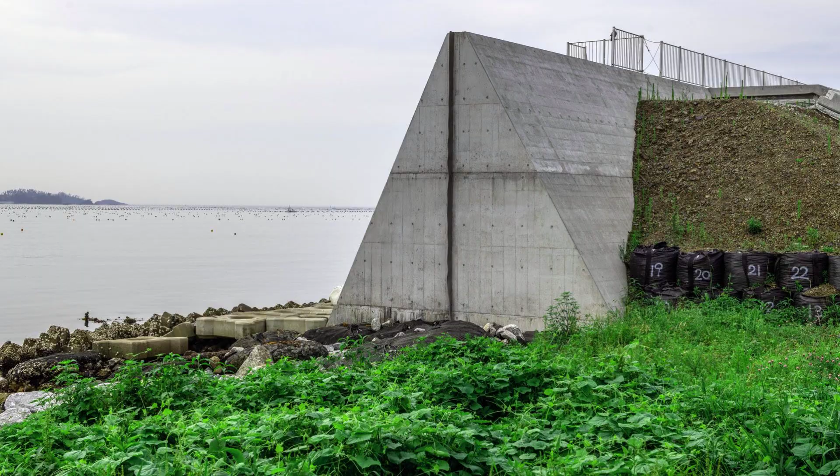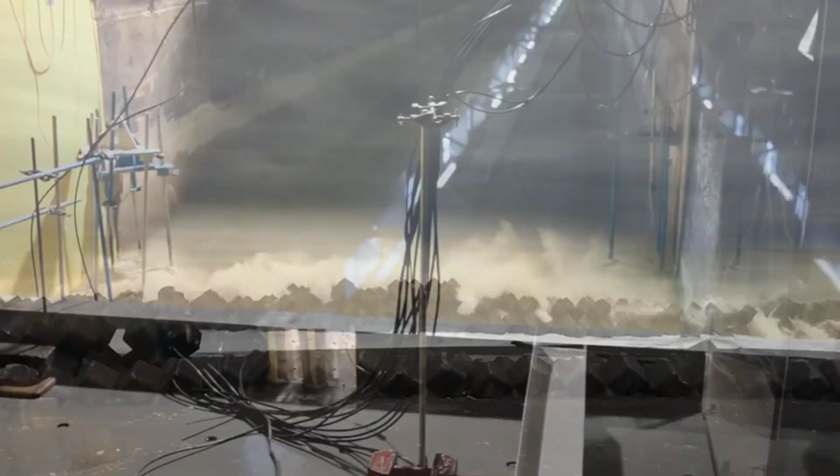A helicopter skims Japan's coastline. Below, a wall taller than a four-story building runs to the horizon, 400 kilometers of concrete between the Pacific and the people who refuse to leave. $12 billion, every meter paid for in grief. Sensors buried inside track each millimeter of movement, because the ocean never stops testing the stone.

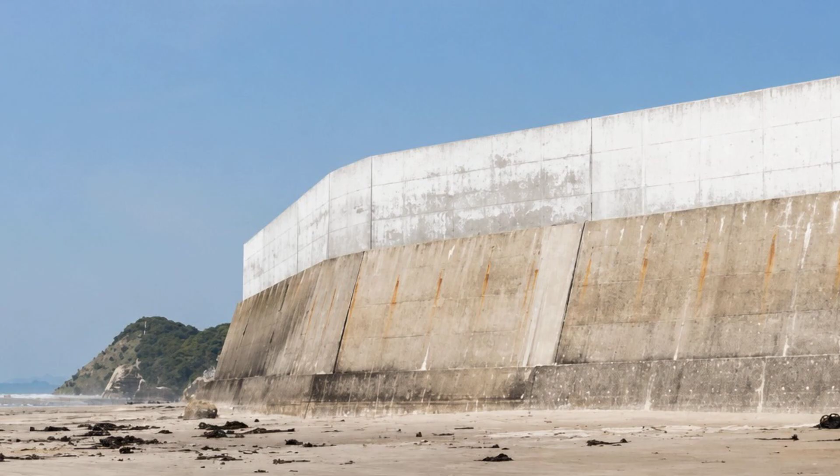The engineers who built it issued one warning. If this wall fails, it makes the next tsunami deadlier than the one that demanded it. Before the new wall existed, Japan already had seawalls. Thousands of kilometers of them, guarding nearly every populated stretch of coast.

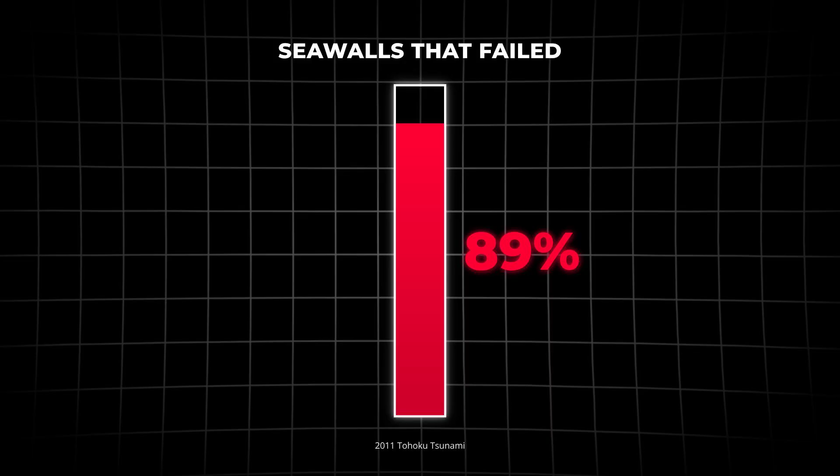On March 11, 2011, the ocean floor lurched 50 meters in 3 minutes. Not a tremor. A geological rupture tearing across 500 kilometers of seafloor. The Pacific didn't ripple. It mobilized. What crossed Japan's coast 30 minutes later wasn't a wave. It was a moving wall of black water, 40 meters tall at its peak, and it treated everything in its path as debris. 90% of Japan's seawalls failed in a single hour.

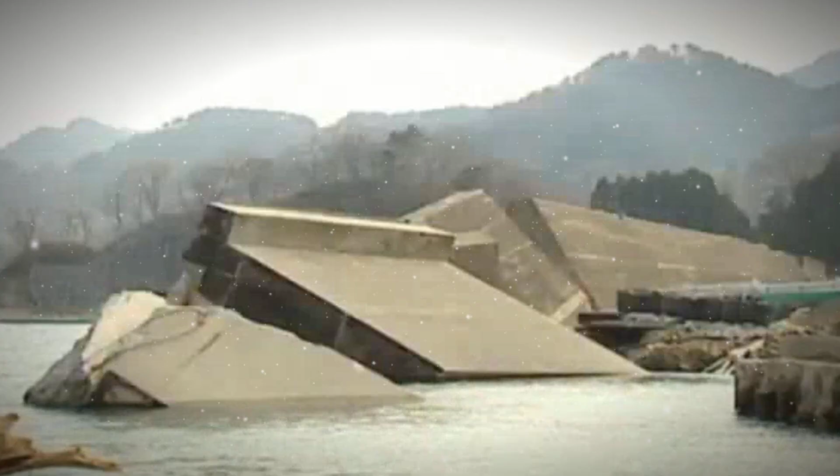The ocean didn't overpower them from the front. It climbed over them. Water cleared the top, found the unprotected back face, and clawed the foundations out from underneath. The walls didn't shatter. They were swallowed from behind. The kill mechanism was overtopping, and almost nothing in Japan's entire coastal defense had been designed to survive it.

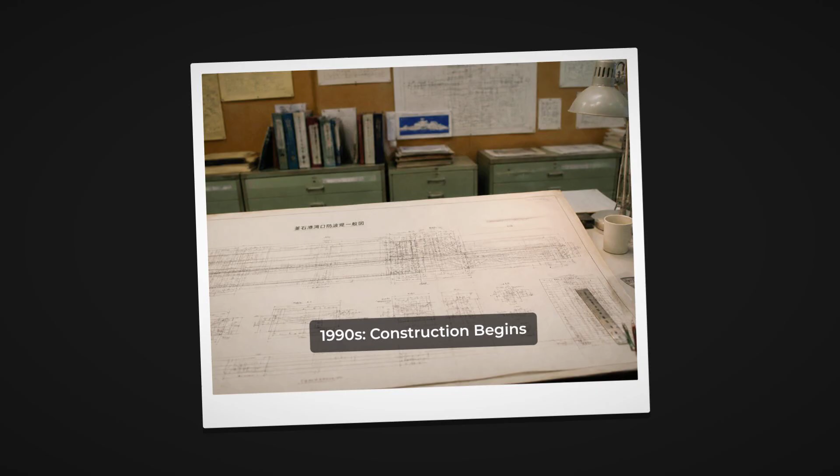The world's largest breakwater stood at Kamaishi. $1.6 billion of engineered concrete, a structure that took decades to design and build, positioned to be unbreakable. The tsunami erased it in seconds. Water poured over the crest, attacked the landward side, and the foundation soil liquefied under the assault. A generation of engineering vanished in less time than it takes to boil water.

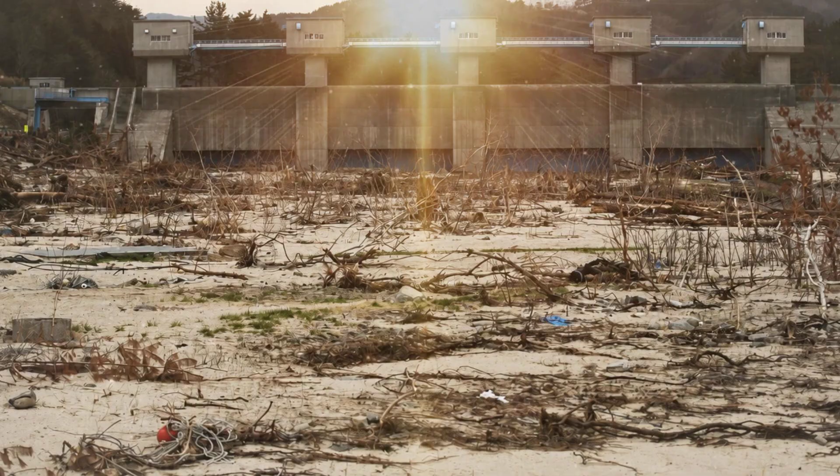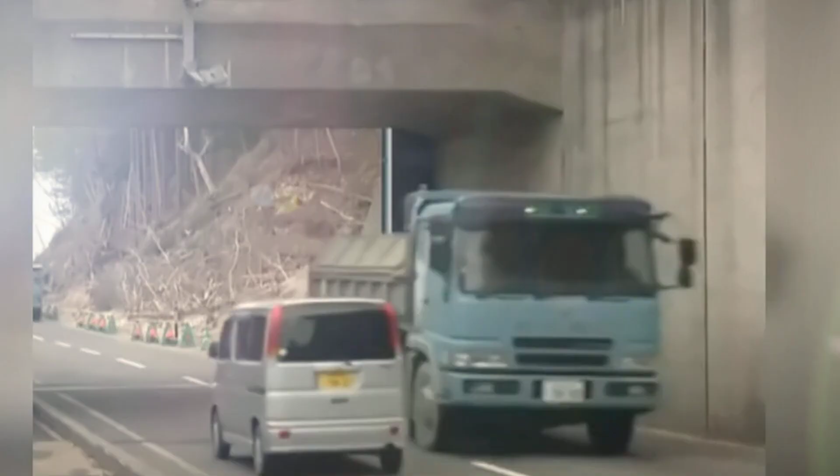18,000 people died that day. Entire towns ceased to exist between breakfast and lunch. But one village survived, not because its wall was smarter, not because the ocean showed mercy. One mayor had spent years fighting his own residents over a wall they thought was too tall, too expensive, too ugly. He won the argument. 3,000 people lived because of it.

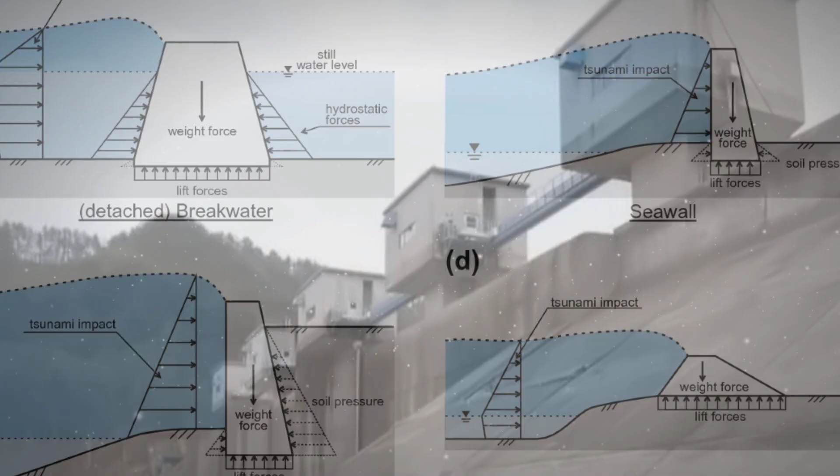That single political fight, waged in meeting rooms years before the wave arrived, gave Japan its blueprint for what came next. The blueprint was simple: build taller. But the engineering underneath that sentence would consume a decade, $12 billion, and 440 separate construction teams racing to build simultaneously along 400 kilometers of active coastline, the same coastline the ocean had already proven it could swallow whole.

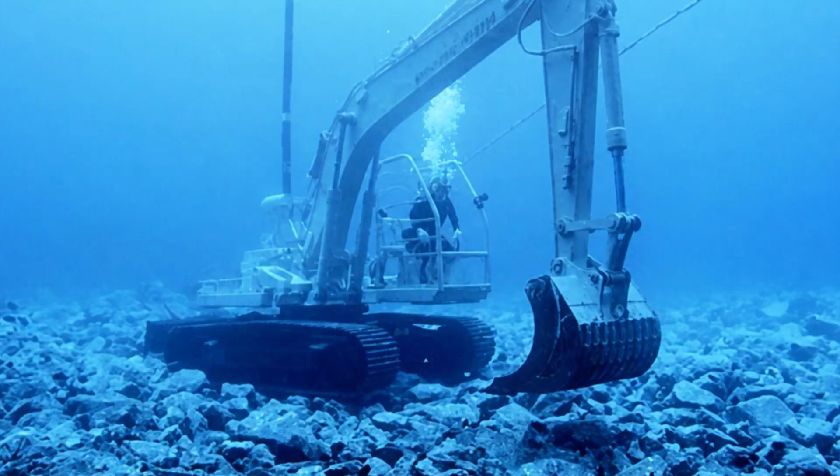Most of the wall is underground. Only 14 meters show above the surface. Everything holding it upright hides beneath the seabed, and the seabed is actively trying to destroy it. Before a single stone touches the coast, survey ships drill the ocean floor to map what waits below. Every kilometer reveals something different.

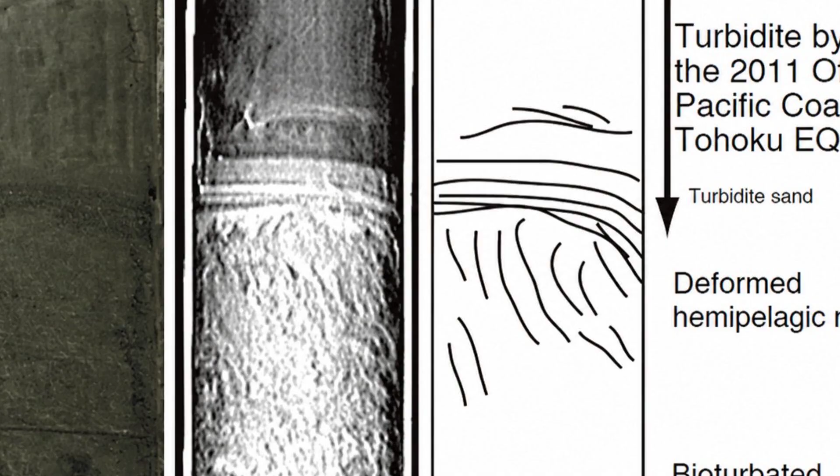Soft clay that swallows anything heavy. Dense sand that shifts under pressure. Hard rock that shatters drill bits. Each demands completely different engineering underneath, and getting it wrong means the wall above slowly tilts, cracks, and feeds itself to the tide. Engineers modeled each section 200 times in a computer before committing a single boulder to the water.

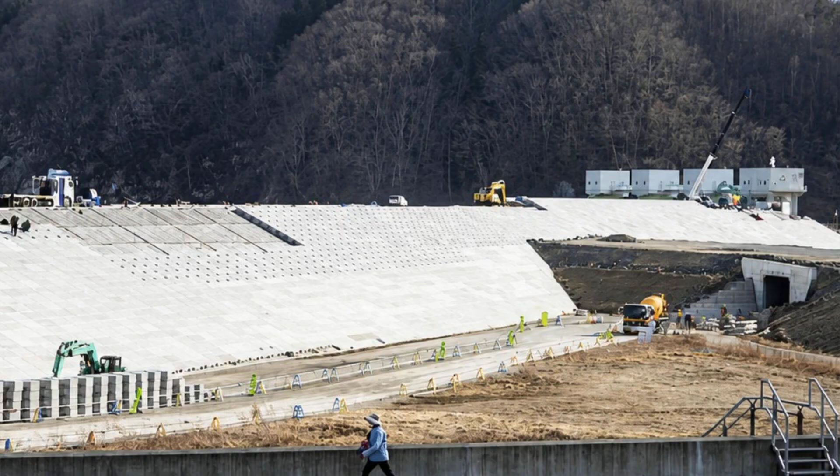440 separate teams worked simultaneously, and if even one contractor went bankrupt mid-build, a gap would open in the wall. The ocean doesn't negotiate with gaps. The tide dictated everything. 4 hours of exposed seabed per day. Every minute accounted for. Every task sequenced against the water's return.

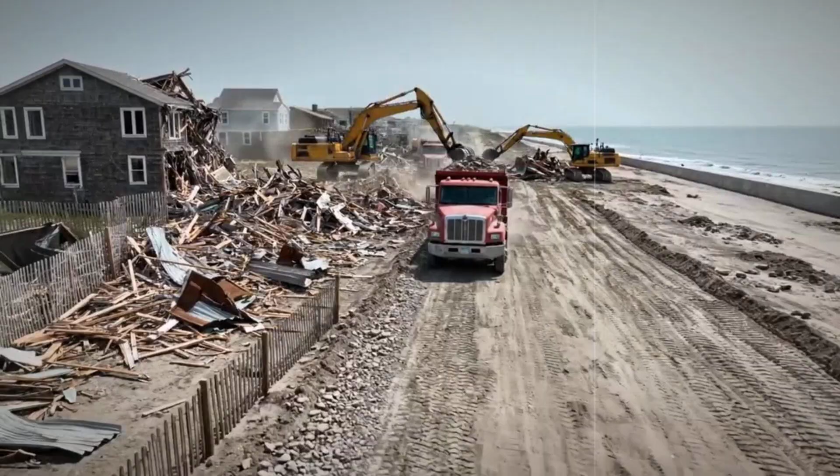In clay zones, the ground was so dangerously soft it couldn't support a bulldozer. Steel road plates spread the machine's weight so it floated above mud that would have devoured it. Simple, effective, and repeated for kilometers of coastline where the earth refused to cooperate.

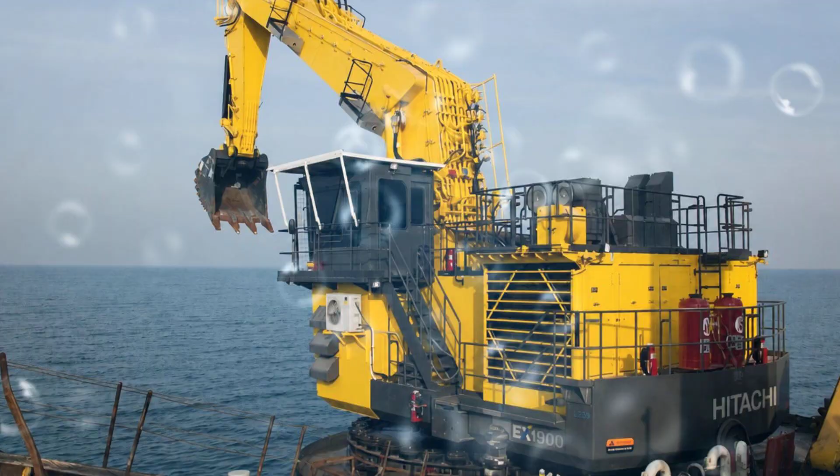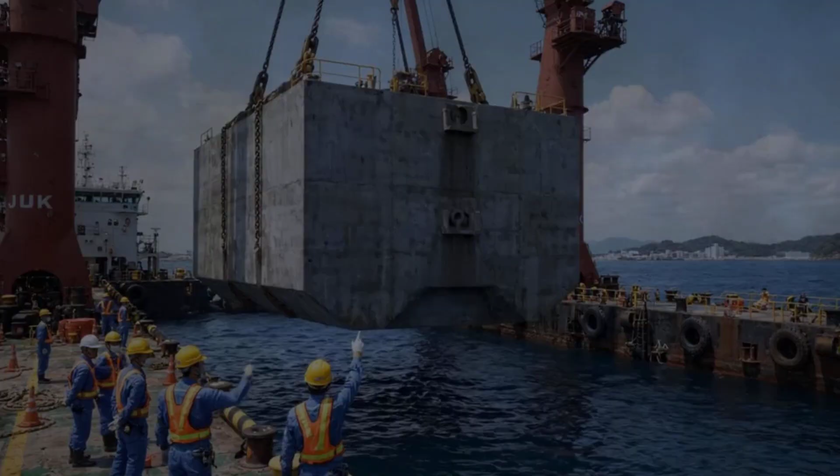Then the work moved underwater. Divers guided 5-ton boulders into position in the same ocean that had just destroyed the coast, while engineers tracked their progress by sonar alone. Nobody could see the foundation taking shape. They trusted the data, or they trusted nothing.

Between the boulders and the fill material sat a filter layer, a membrane so critical that missing it in a single section would let the wall slowly bleed its foundation into the sea, grain by grain, until the structure above had nothing left to stand on.

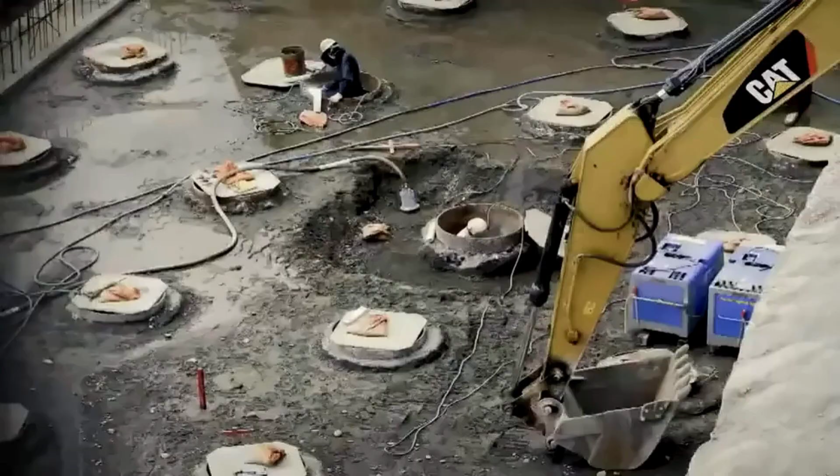After weeks of blind underwater construction, the rubble mound finally broke the surface. The foundation existed, but now the wall had to rise into open air, and every layer it gained made it heavier, less forgiving, and more vulnerable to the thing that had killed every wall before it: rain.

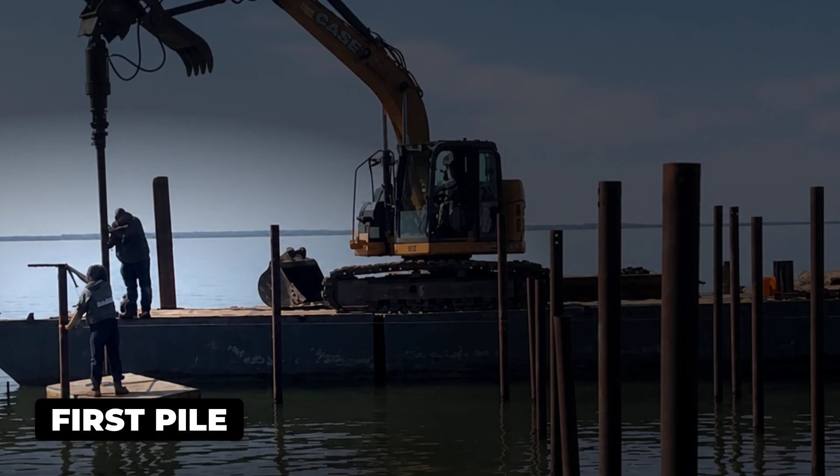The first steel goes into the ocean floor, not upward. Sheet piles driven 10 meters deep protect the wall's toe, but not from the arriving wave, from the retreating one. Backwash, the vacuum of water pulling back toward the sea, is what murders foundations. It sucks the sand out from under the structure and leaves the wall standing on nothing. The arriving tsunami gets the attention. The departing water does the killing.

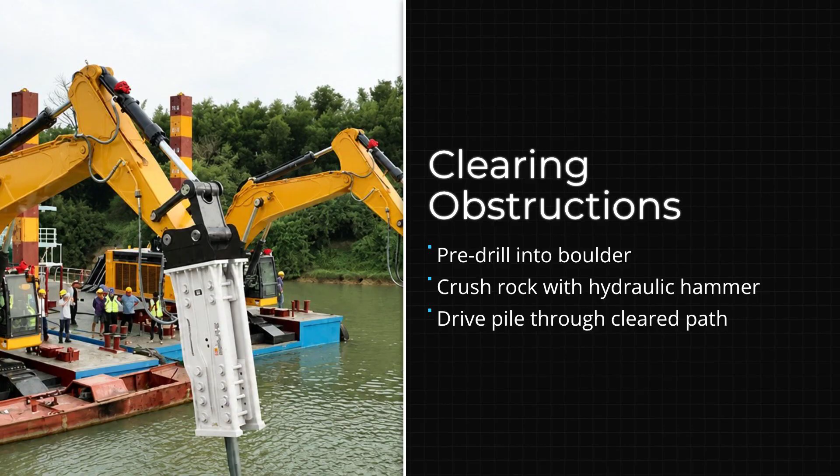One buried boulder deflects a 12-meter pile sideways, and the entire alignment is destroyed. The fix is brutal. Pre-drill the boulder, crush it in place, then drive the pile straight through the cleared hole. Clean. But every obstruction costs hours the schedule doesn't have.

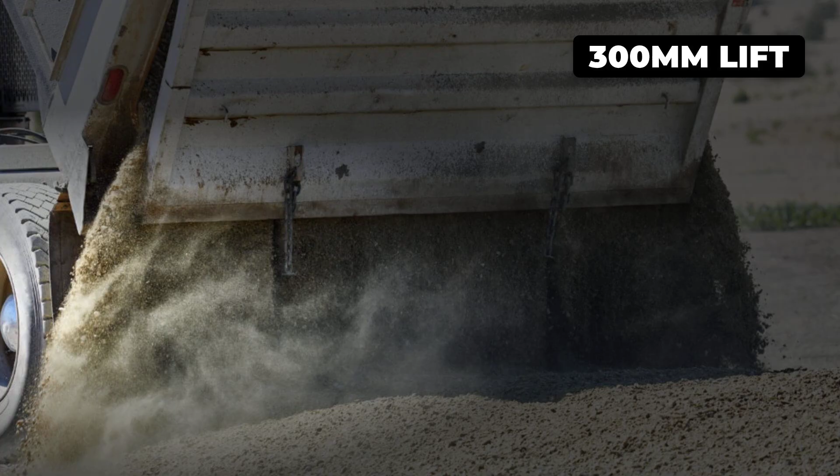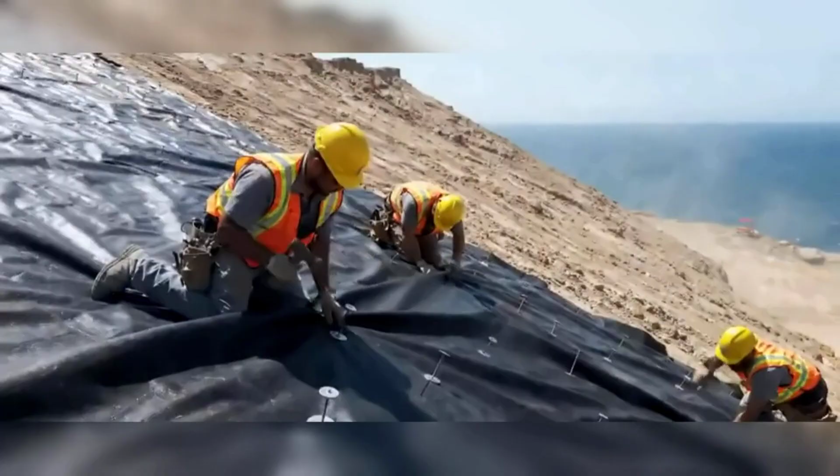Above the piles, fill arrives in 300-millimeter lifts, no thicker. A compactor can't reach the bottom of anything deeper, and uncompacted fill settles unevenly, and a settling foundation tilts the wall. Geotextile reinforcement layers run through the body like tendons, holding compacted earth together the way rebar holds concrete. Every single layer is tested.

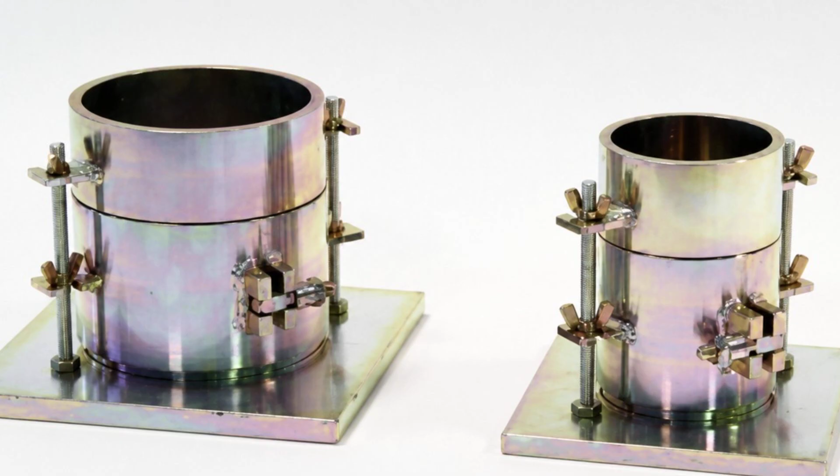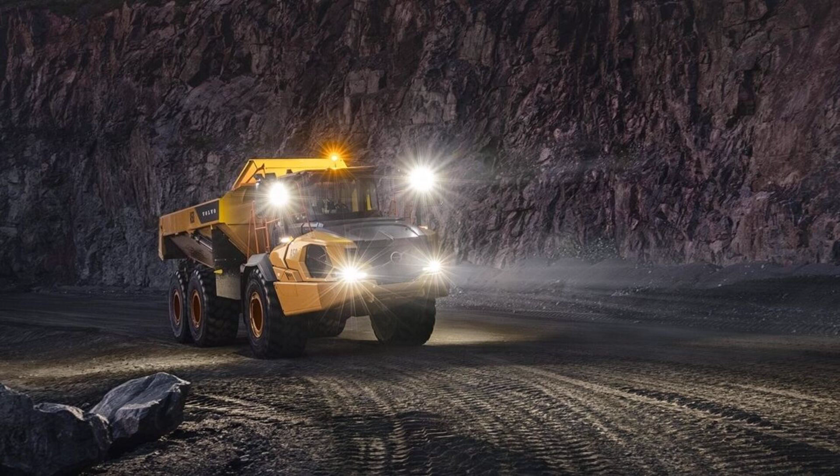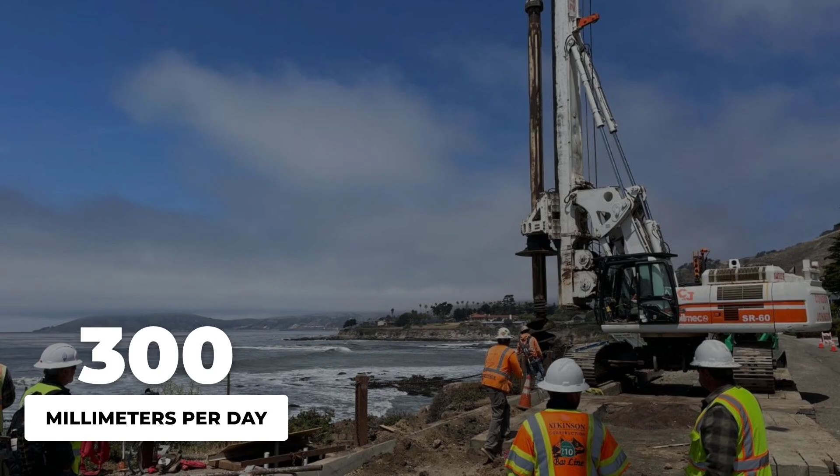98% Proctor density, or the inspector shuts the job down. Press your foot on fill compacted to 98%, and nothing moves. At 85%, it sinks beneath you. 30 dump trucks running 16-hour shifts fed the wall non-stop. One breakdown stalled the entire compaction cycle. 300 millimeters per day, 18 months until the first tsunami season with the wall standing. The math left no margin.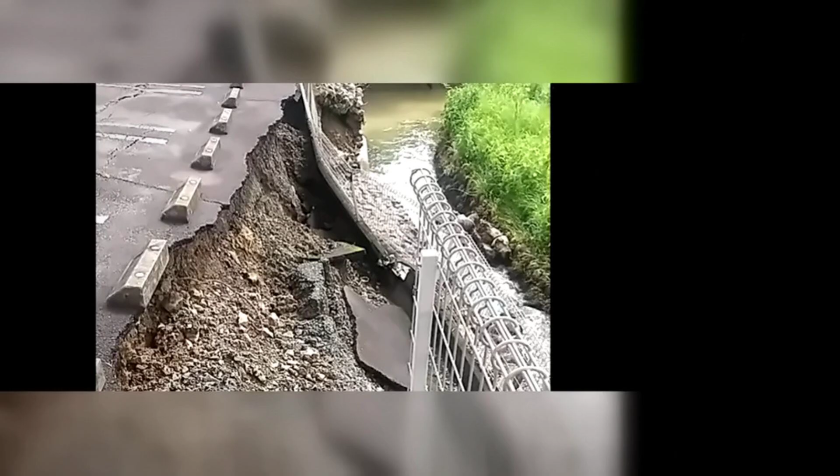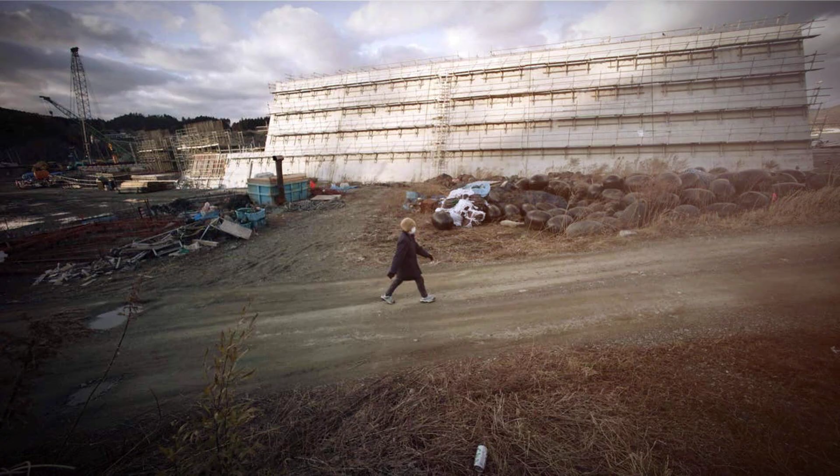Then a single night of heavy rain erased weeks of progress. 600 millimeters of completed slope slumped away in the dark. The entire section was rebuilt from scratch. After that, every slope was covered with geotextile before every rainfall, no exceptions. The rain had taught the crews what the ocean already knew. Water doesn't need to arrive as a tsunami to destroy a wall.

At 10 meters, the earthwork stopped, and the first 7-ton concrete panels arrived, slabs that would take a tsunami at 30 kilometers per hour and hold their ground for 100 years, provided every millimeter of their casting was perfect.

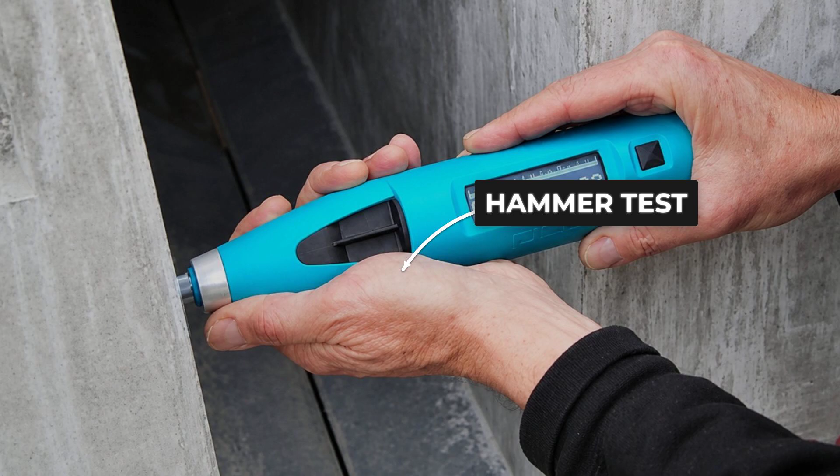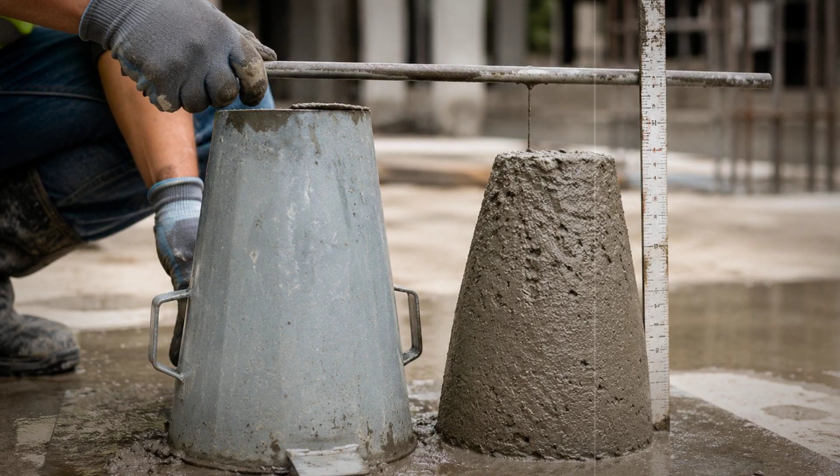A technician taps a freshly cast panel with a hammer. A solid ring means good concrete. A hollow sound means the panel gets crushed. 7 tons, $800, destroyed on the spot. Zero tolerance on tsunami walls. The wall demands perfection, and it enforces that demand by consuming its own components.

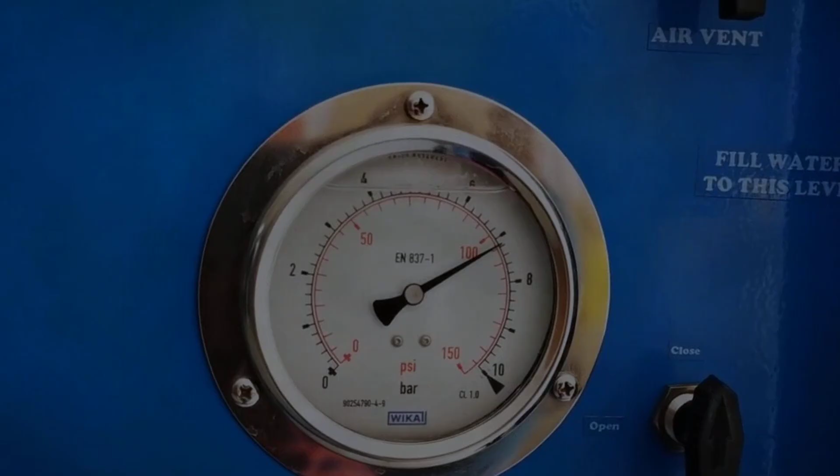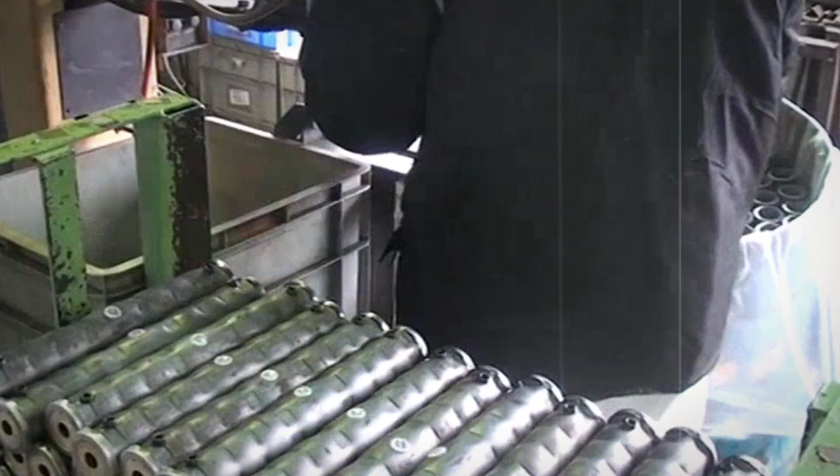Wrong concrete slump, and the panel face honeycombs, tiny air pockets that become entry points for salt water, then corrosion, then failure under wave pressure. One bad batch condemns the entire production run. Self-compacting concrete flows around every hairpin bar connecting panel to crown wall, filling every void, leaving a surface smooth enough to deflect a tsunami without giving it anywhere to grip. One missing bar breaks the connection. One void compromises the face.

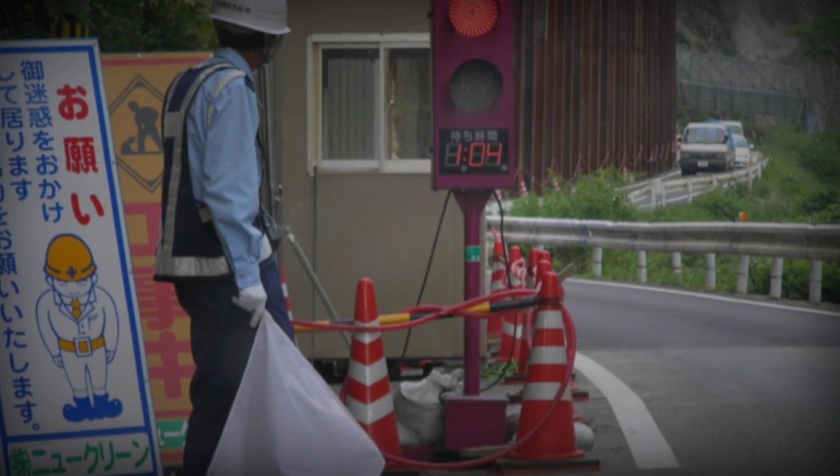7-ton panels travel narrow Japanese coastal roads, flagmen stationed at every junction, across 400 kilometers of delivery routes. The transport bed is leveled to 5 millimeters. A single hump cracks a corner, and the panel joins the crusher pile. The tolerances don't loosen because the logistics are difficult.

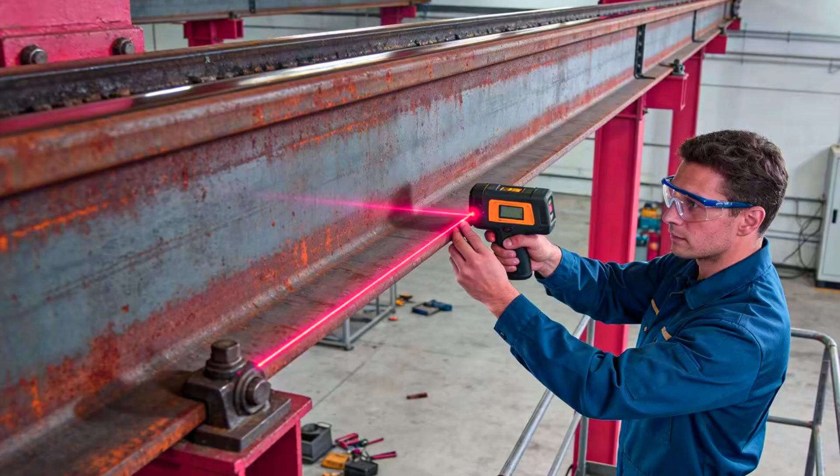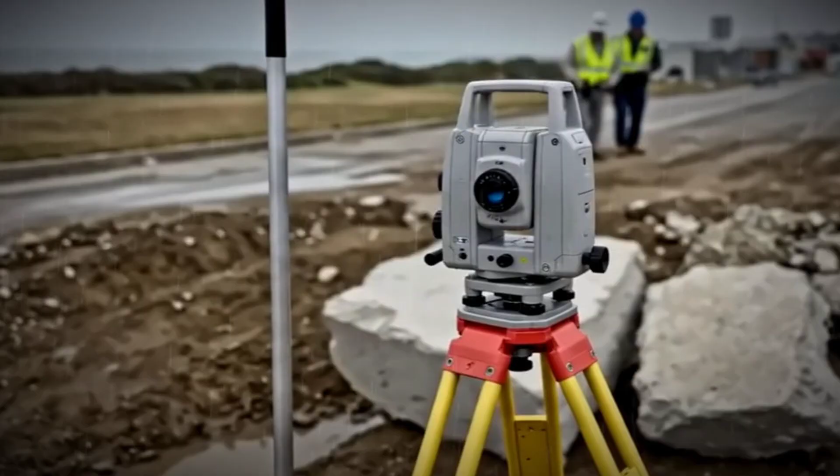They tighten. Straight panels meeting a curved coastline open 20-millimeter gaps, and water finds every one. It forces through, attacks the fill behind, undermines everything below. 37 unique panel shapes, each cast in CNC-machined molds, close every gap to zero.

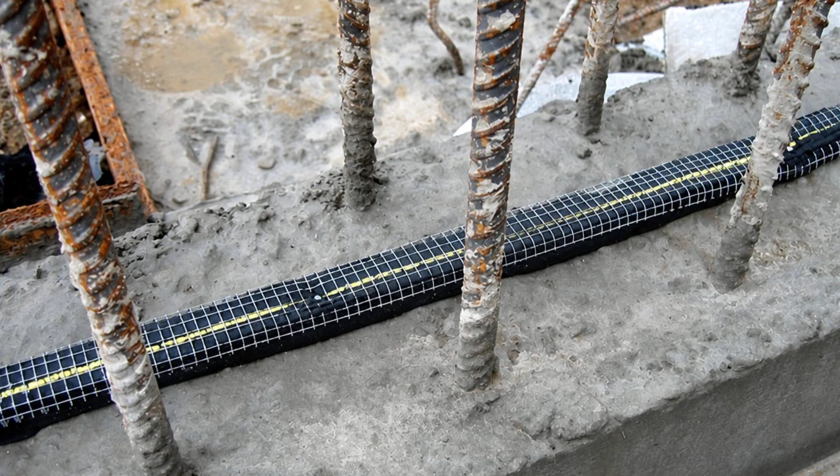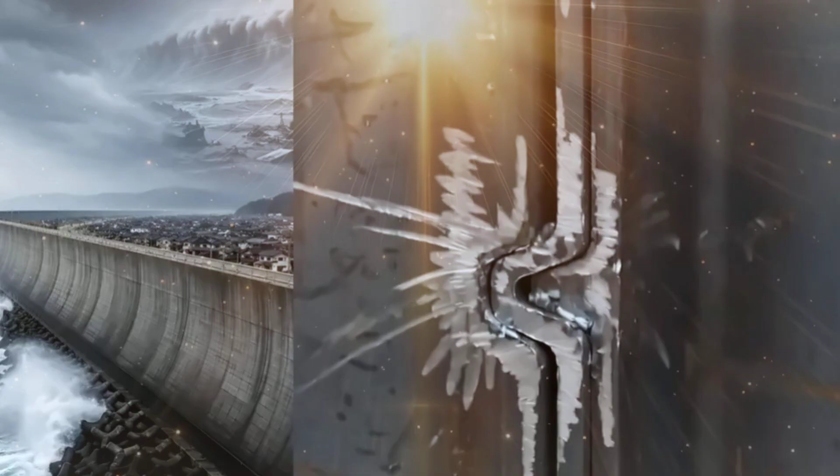Rubber water stops line each joint, material engineered to swell on contact with moisture. The bigger the wave, the tighter every joint seals itself. The tsunami activates its own containment.

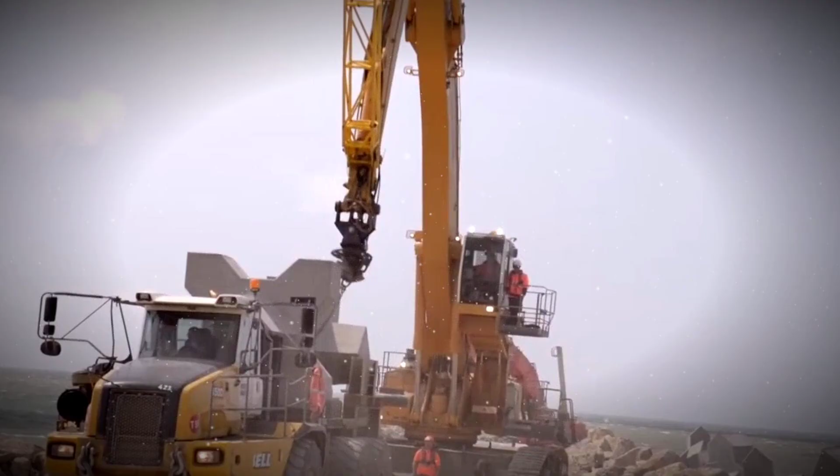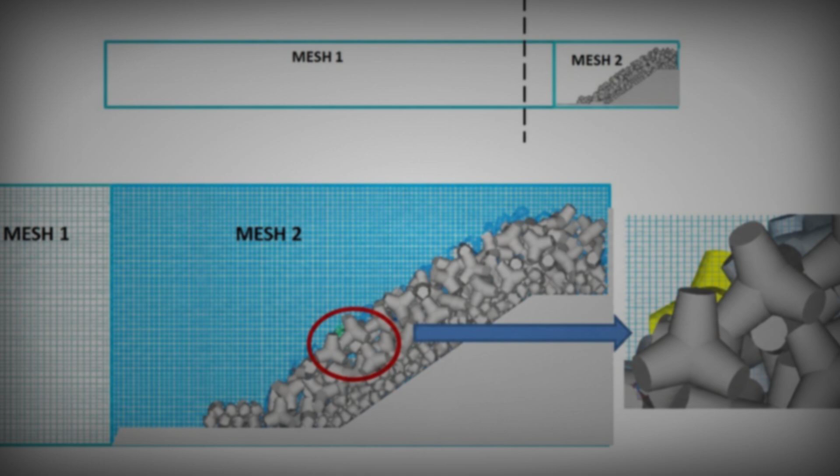Behind the panels, 32-ton tetrapods armor the seaward face. They are not placed precisely. They are dropped. Each one finds its own stable position, one leg always pointing upward to catch the next tetrapod above. Chaos creating order. The gaps between them are the mechanism, not a flaw. Water flows through, energy dissipates across thousands of interlocking surfaces, a single liter absorbed completely. Now multiply that by 50 million tons of tsunami, pushing against the coast.

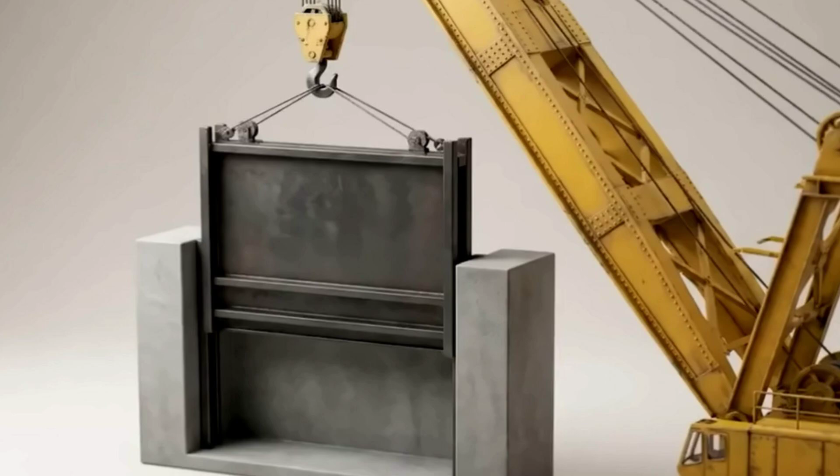400 kilometers of wall, armored and sealed, but 443 holes punched straight through it. Every river mouth, every harbor entrance, every road crossing the coastline is a gap, and each gap is a death trap if the single gate covering it fails to close in time.

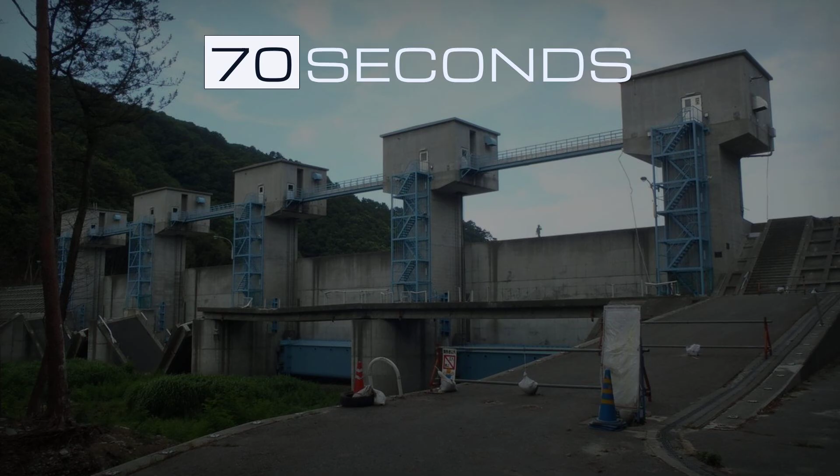A seismic sensor fires. Somewhere along 400 kilometers of coastline, a floodgate begins closing. 70 seconds. That is the entire window between the earthquake and the wave reaching the coast. The gate does not ask permission. It does not wait for confirmation. It moves. Floodgate concrete runs twice the thickness of the wall itself, because this is exactly where tsunami forces concentrate hardest. The wave doesn't spread evenly across the barrier. It hunts for openings and throws its full weight into them.

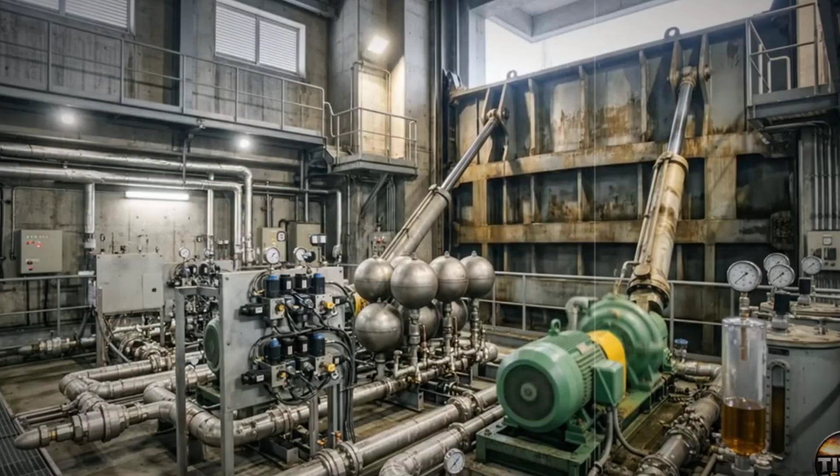50 tons of steel swing on 15 millimeters of clearance during installation in 40 km/h coastal winds. The margin between a gate that seals and a gate that jams is thinner than a human finger. 14 seals line each gate. If one leaks, the gate fails completely.

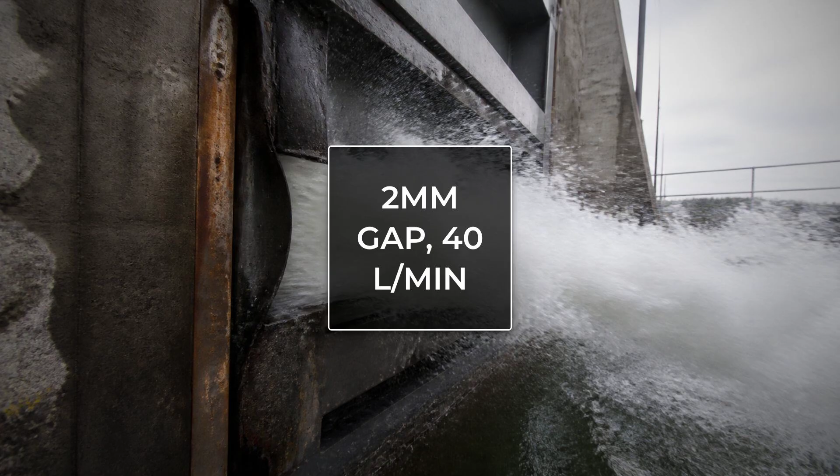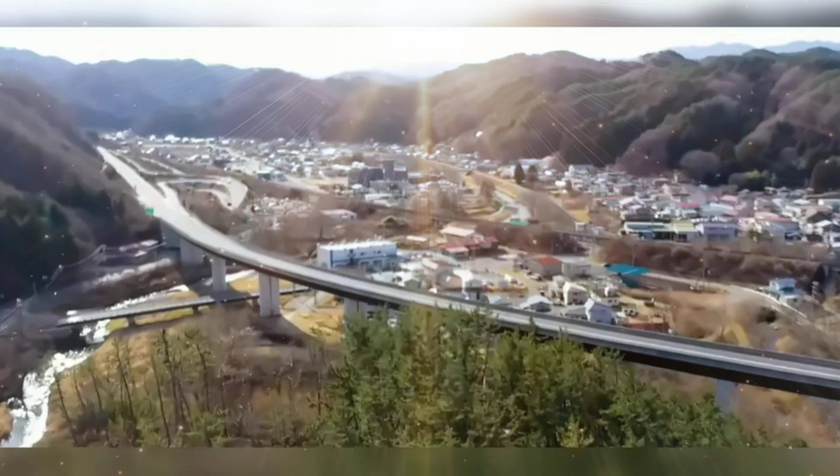40 liters per minute pour through a 2-millimeter gap under normal water pressure. Under real tsunami loading, that gap stretches to 20 millimeters, and 40 liters becomes a flood. Engineers grind 2 millimeters off a seal face, retest, confirm zero leakage. 3 hours of machining saves an entire town. The seal doesn't care about the cost, it cares about contact.

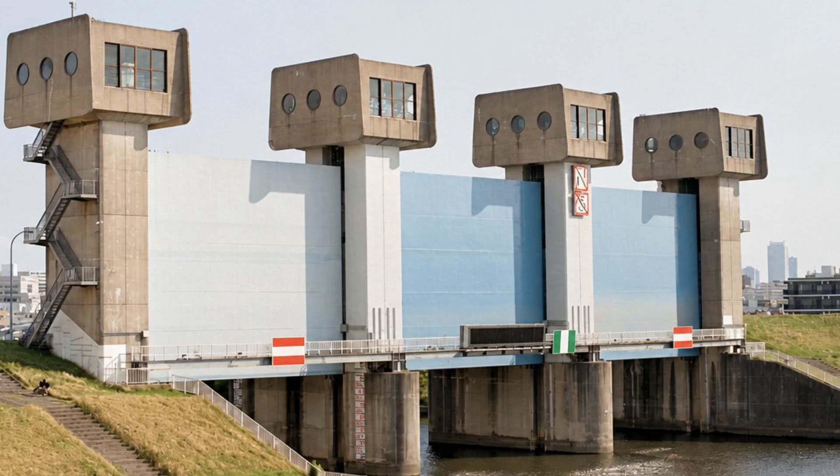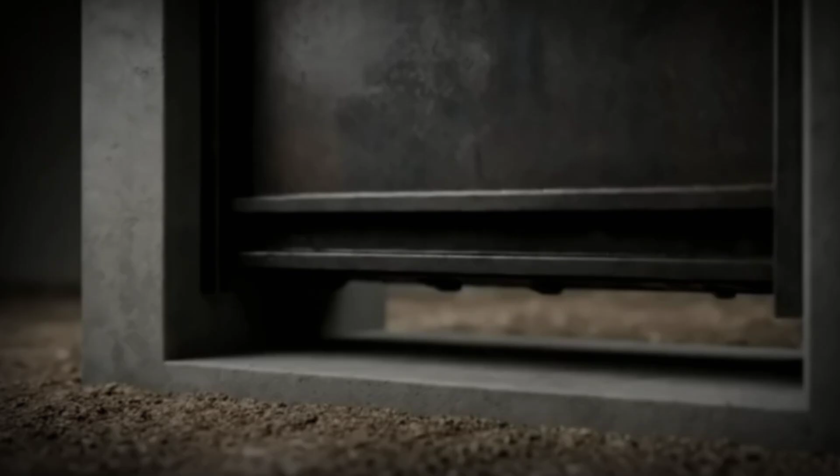River mouths demand something larger. A 22-meter steel curtain hangs stored open above the channel, waiting. Gravity closes it. Power failure doesn't stop it. Human absence doesn't stop it. The earthquake begins, and the curtain drops, sealing the river mouth before the wave turns the channel into a funnel, aimed directly at the town behind it.

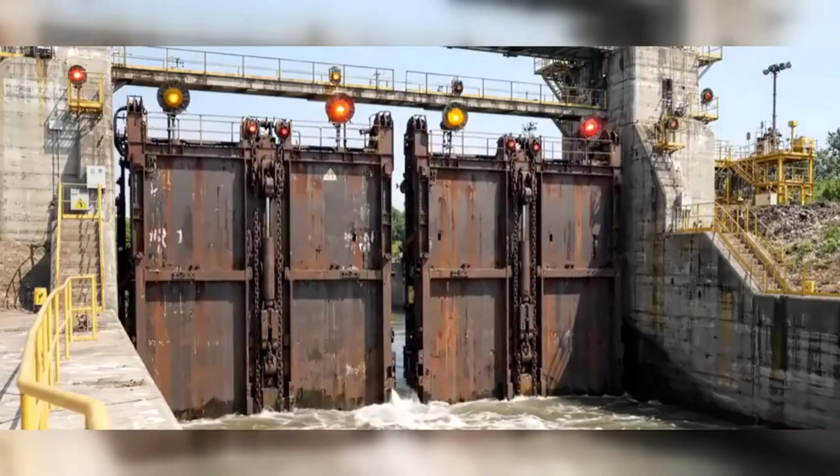443 gates. 1 command room. 4 minutes and 20 seconds to confirm every single one has sealed. Japan rehearses this every March 11th, the anniversary serving as both memorial and operational drill. A driver caught in the gap when the alarm triggers faces the same 70-second window the gate does. The system does not distinguish between obstacles. The gates sealed during drills hundreds of times.

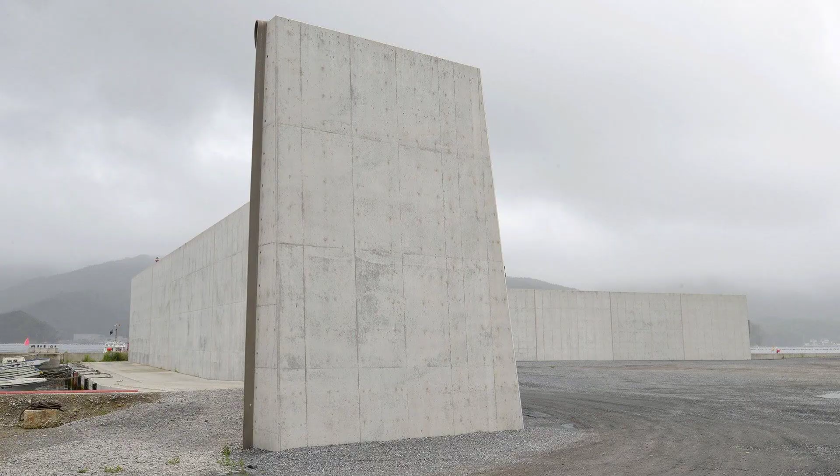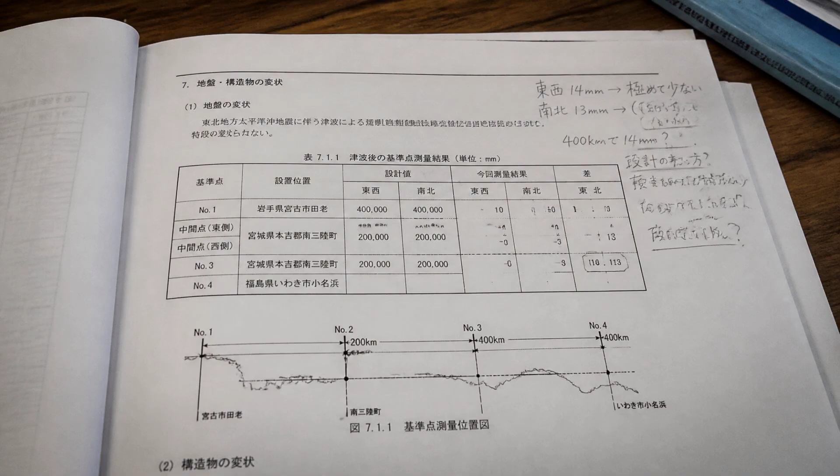But on the day a real 7.4 earthquake struck, every sensor in the wall fired simultaneously. All 443 gates closed at once, and the engineers who built them watched their screens and waited for damage reports from a system that had never been tested by the thing it was designed to survive. 0 cracks. 0 shifted tetrapods. The damage reports came back from every section of the wall, and the numbers were almost unreasonable.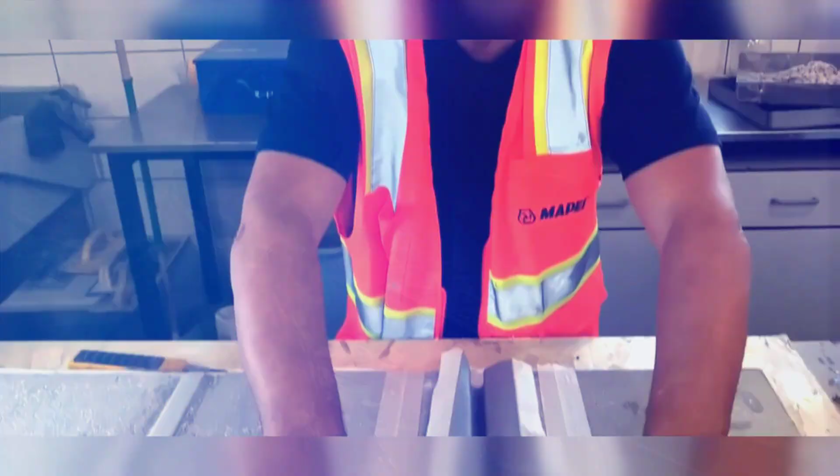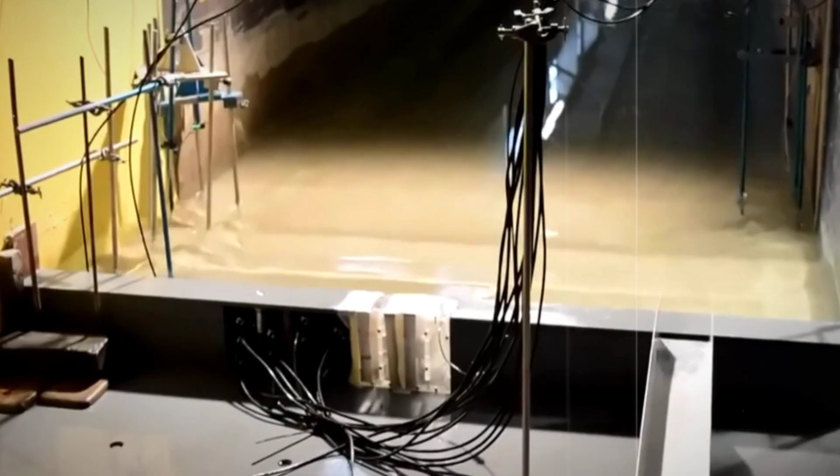14 millimeters of differential settlement across 400 kilometers in 2 years on coastal sandy ground. Engineers expected worse. The ground had every reason to move, and it barely whispered. The wall didn't survive because it was rigid. It survived because it was designed to breathe. Sensors embedded inside the concrete track every millimeter of movement, every shift in pressure, every slow exhale of settling fill. Engineers watch the data every single day. The monitoring never stops because the wall is not a finished object. It is a living system under permanent observation, and the ocean is permanently probing it for weakness.

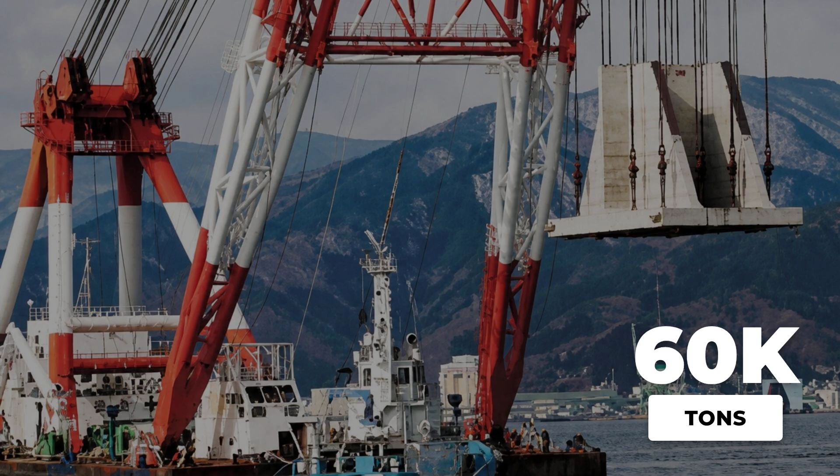At Kamaishi, where the tsunami had erased the world's largest breakwater in seconds, a new structure now stands. 60,000-ton caissons, sunk to 63 meters. The rebuilt breakwater is stronger than the world record it replaced. 2 millimeters of carbonation seal the concrete surface. The reinforcement inside will not taste sea air for at least 100 years. The ocean took Kamaishi's wall once. The replacement was built to make sure the ocean remembers.

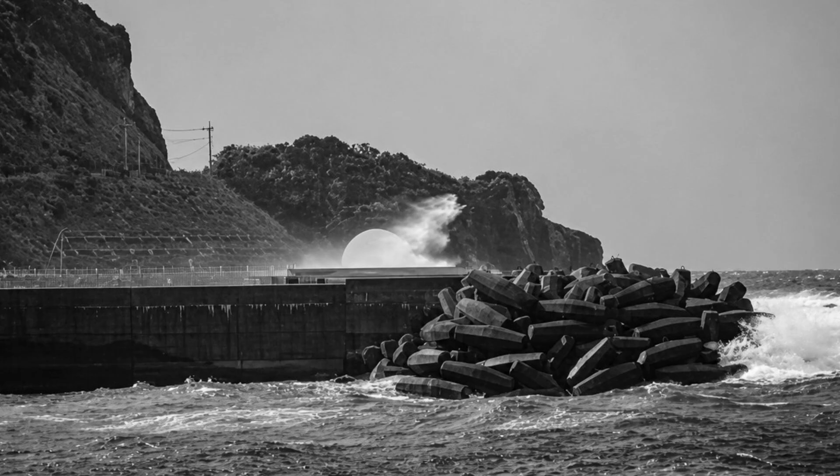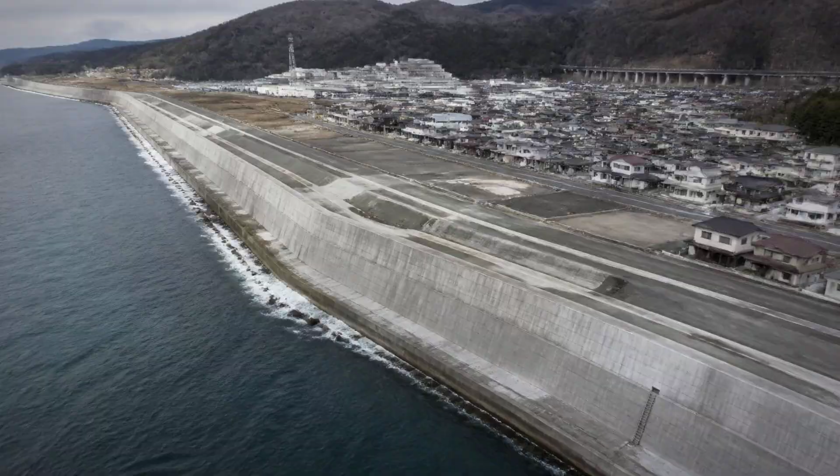A helicopter flies the full 400 kilometers. What it photographs looks like a gray line drawn between the land and the sea. From above, the wall reveals nothing of what lives inside it. The sensors, the tendons, the drains, the hairpin bars, the filter layers silently holding everything in place.

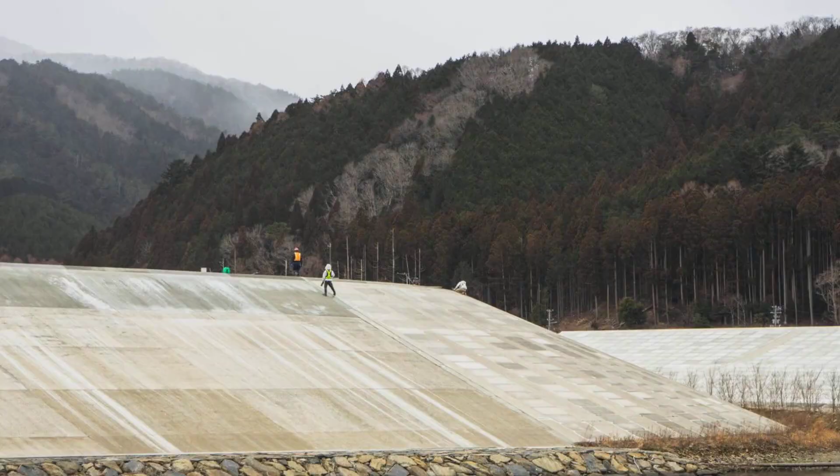But at ground level, people cycle along the top. They walk dogs. They run every morning. Staircases built into the face are not scenic overlooks. They are evacuation routes designed from crowd-flow science. The wall was built from grief. It became part of daily life. And every morning it stands, it is negotiating with an ocean that has not agreed to stop.

Somewhere in the North Atlantic, engineers are solving the opposite problem, forcing an entire ocean current through a 2-kilometer gap to power a nation. 4 million cubic meters per second, funneled through concrete that doesn't exist yet. The first pour happens this decade.